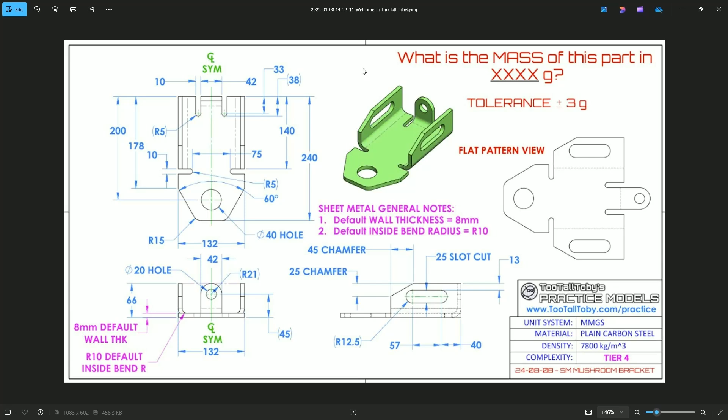And we know some other things: there's a sharp edge here that's at 178. The width is 132, and our bends are set back at 140. And we have this shape here that's got an angle on it at 60 degrees overall. So we'll go ahead and show you how to design this in IronCAD, and we'll use this information here for a lot of this as reference. I'll put it on the other screen, but you can have this if you like by grabbing that practice model.

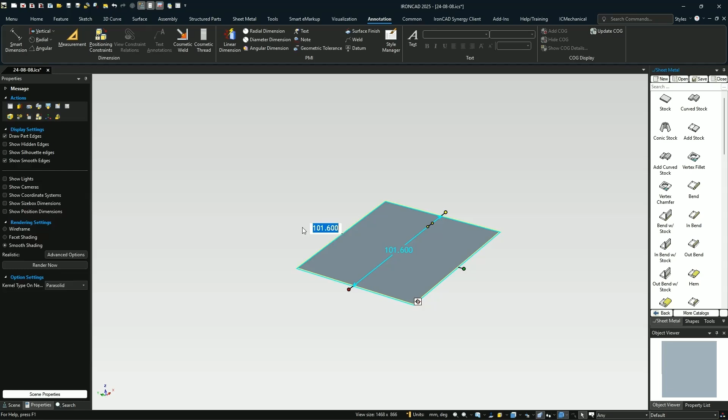So what we're going to start off with is sheet metal, so you can access that in our starters catalog, or you can go into our more catalog and select sheet metal. Either way, you get to the sheet metal components, and we're going to drag and drop that out. I have my system in English, so these are all in English units, so I'm just going to hit OK on that, and then I'll go into our part properties and set the values here. In our case, the thickness was 8 millimeters, and the inside bend radius is 10 millimeters, and we'll select OK to drive that.

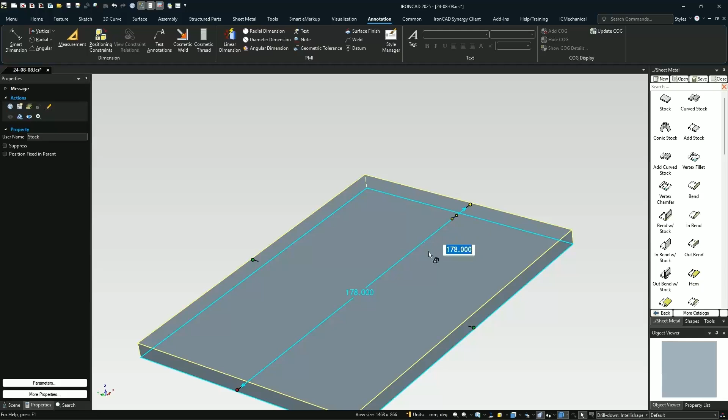Next, we'll go ahead and set the overall size of this. So we know the width was 132, and the starting point that we want to use is actually this sharp corner here before that angle, so that's 178. So that's our starting location. This is kind of our bounding box, if you will. So everything has to fit inside of here from our bend standpoint.

So to do that, we're going to use our out bend. We're going to drag and drop that onto an edge inside of there, and we can pull this up and set the value for this. There's a couple ways to do this. One is just right click on this handle and select edit distance from point, and you can select any reference. In our case, it's the bottom edge here, and it's 66 millimeters from that.

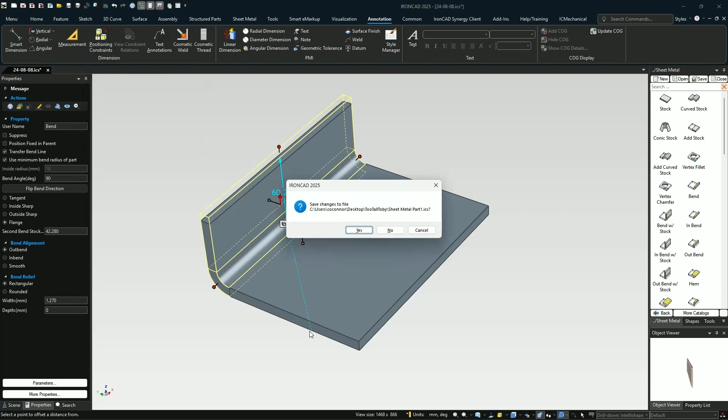Let's see if it changes that. Sorry, I hit the key there on my keyboard. Sorry about that.

So now we've got that set to 66. Next, we want to set the distance of this bend, which is going to be set back. In our case, it's going to be set by double clicking on the handle at 140. Next, we want to do this relief. You can build a cutout and a blend on there, but in our case, we actually have bend reliefs on this thing.

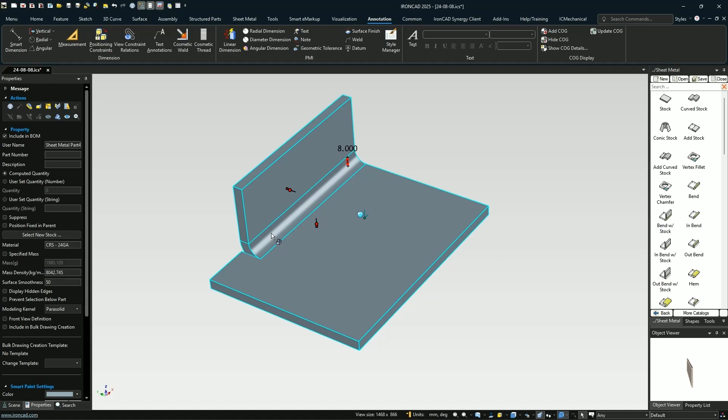So what you can do is hit your tab key while you have a bend selected. It'll switch over to our other handles, which are the bend handles, where you can pull these bend segments in or select these to add a relief. In our case, we're going to right click on that and hit bend properties because we need to set the value for that. In our case, it's 10 millimeters, and we need to calculate this other value, which is actually the 132 minus 75, because they give you a dimension here.

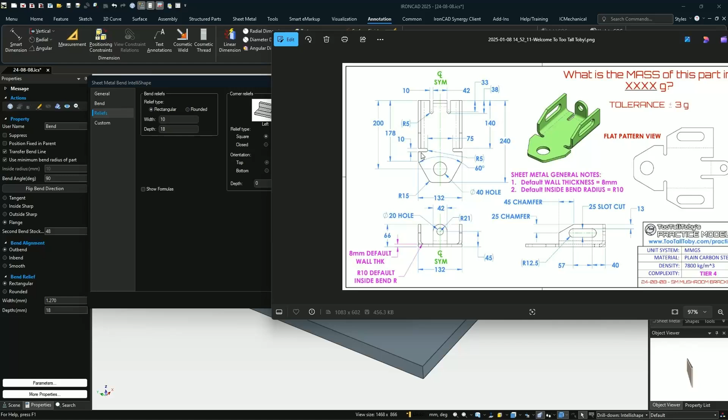I'll show you this. They give you a dimension from inside to inside. So we know this is going to be 5 millimeters here. From this geometry, this cutout here, that's going to add the radius on there, then it's 75. So we'll just subtract those, divide by 2, and subtract the 5, and that basically gives us 23.5 for where this edge is, and then the 5 millimeters will be added for the radius. So we'll go ahead and put that in there as 23.5.

And in our case, don't worry about this. This is if you show formula. There's a formula behind here that's driving this geometry. But in our case, we're going to select rounded and hit OK. So that will build our geometry for us automatically. And now we can continue on our geometry.

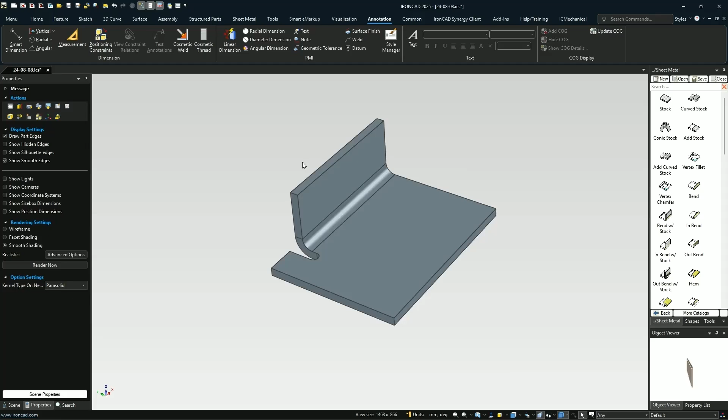The next thing is we want to add a chamfer here. You can use our chamfer tool, or we have a feature called vertex chamfer that you drag and drop on a vertex point, and then you can just use the handles to set the value. In our case, it's got a value of 45 in one direction, and in this opposite direction, this is 45. This one here is going to be 25. So we'll type in 25 for that to build that shape.

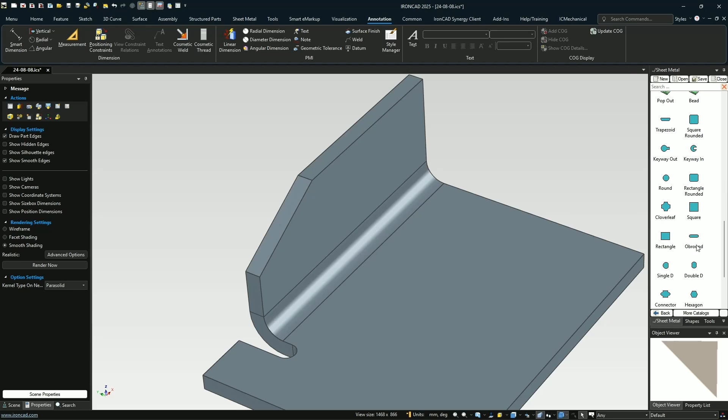Next, we're going to put our slot feature in here. We can drag our standard slot feature out, or you can scroll down. We have some shapes inside that have additional properties. For example, this obround. We'll just drag and drop it out here.

The first thing I'm going to do is rotate this around. So I'm going to lock the tri-ball, grab this axis, and lay it in that direction, so it's going in this direction.

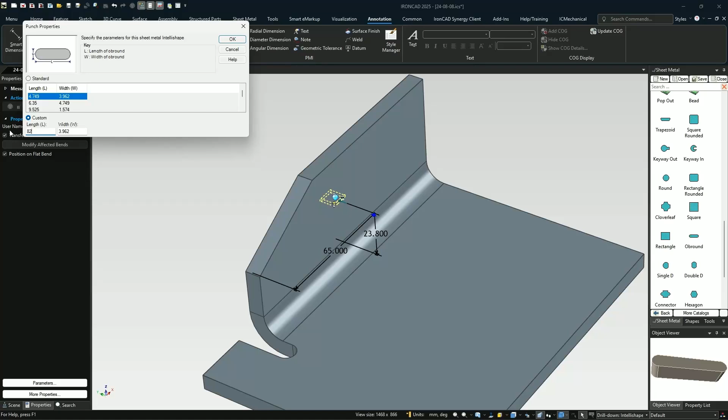Then we can right click and go to tooling properties, and set the overall value for this. In this case, it's going to be 57 plus 25, so 82 for that, and 25 width. We can hit OK.

Next, we need to position this. It's got a reference of 40 millimeters from this edge to the center point, and from this top edge to here is 13 millimeters.

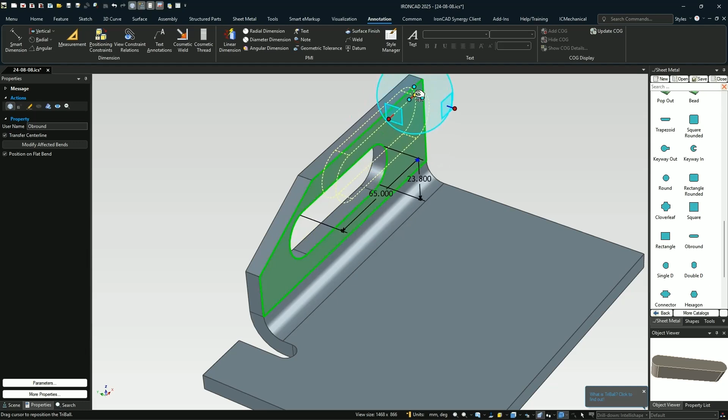So what I'm going to do is turn the tri-ball on, hit the space bar, and move it up to this point here, which gives us the center point and the top edge at the same time. Now I can move this by hitting the space bar again, moving the whole shape up to this top corner point.

Now I can use what we call our plane handle. I'll right click and move this down, and it's going to give us two directions here. If we go ahead and hit move, it's going to give us those values. It's kind of hard to see, but if you zoom in, it'll give you direction 1 and direction 2.

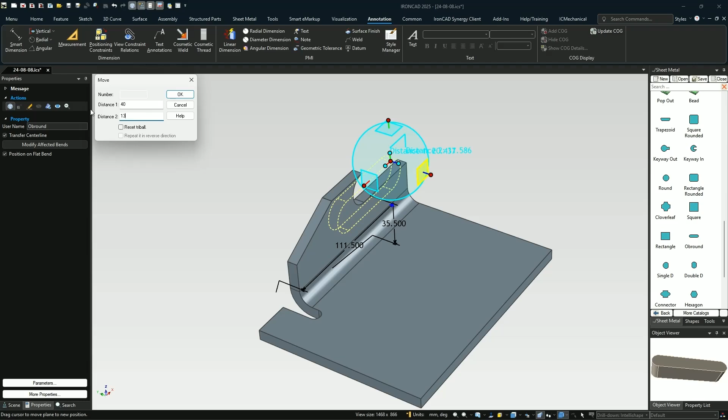Our direction 1 in our case is going to be 40, and our second direction is going to be 13. We'll hit OK, and that should move us to those locations.

Just to confirm, you can select this edge here, select your top edge, and you'll see that distance is 13 millimeters from there to there, so that gives you the value for that.

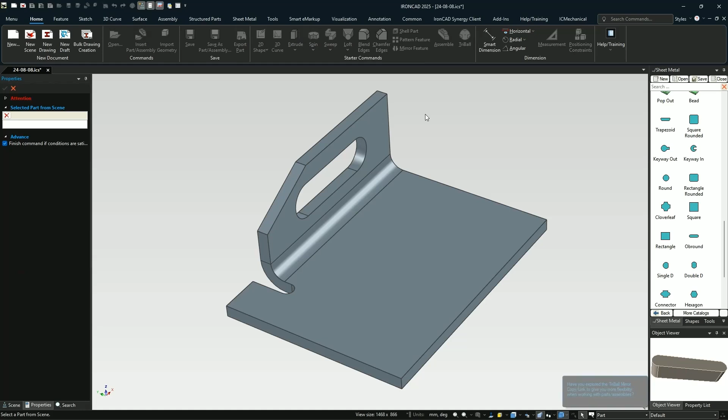Now that we have that shape created, we need to duplicate it onto the other side. So we'll use our mirror feature command. If we go to our home or feature commands, you can select the mirror feature or select our part. What we're going to mirror is this bend.

We're going to select our slot feature and our cut feature here that we want to mirror, and our plane in this case is going to be the center point of this geometry. Hit OK, and now we have that on the other side as well.

Next, we're going to drag another bend out here. Again, it has to be an out bend because it needs to be on this back edge. So we'll scroll back up here, get our out bend, and drag and drop it right on that center point, because it's important to have it there.

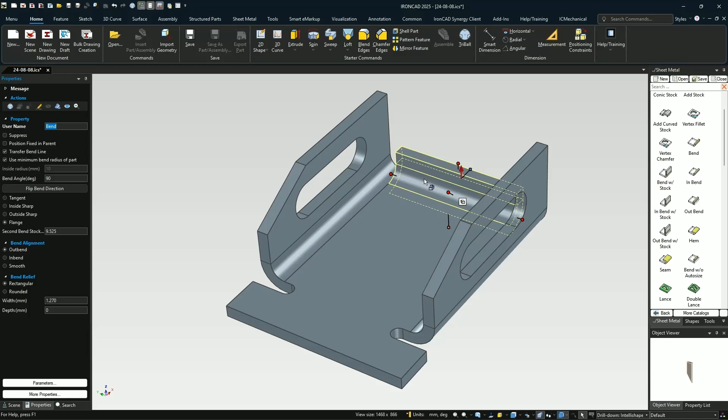What we need to do is set the width of this, and we know the overall width is 42. So you can go into the IntelliShape properties, and there's this above and below, which gives you the total from that center point where you drop, and the distances to the left and the right. In our case, we want those to be 21 and 21, which gives a total of 42 to get that centered.

Now, I mentioned we need to set the height for this before. We right-clicked on this and set it to the bottom edge. To set that, you can also double-click on these, which brings up your stock bend height, and you have various settings in here.

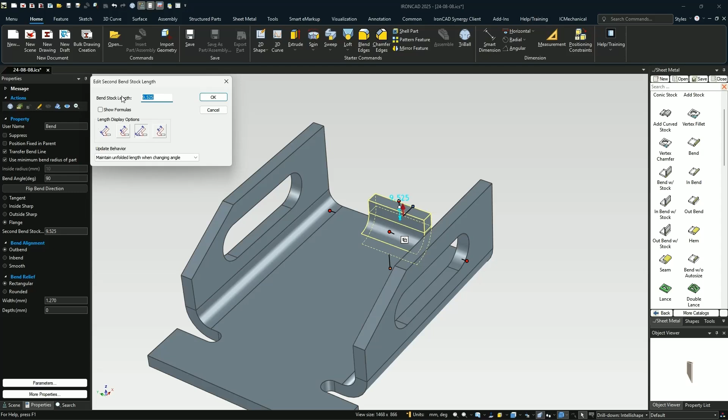So if you want a virtual sharp value inside of there, you can edit that distance. In our case, this needs to be 45 from that virtual sharp, so we'll go ahead and set that.

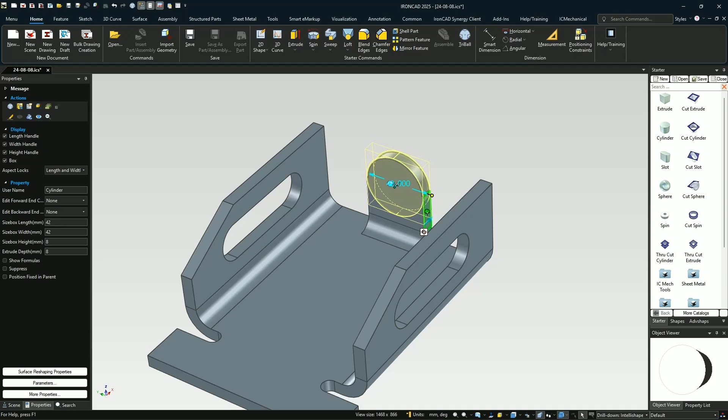We can use other geometry inside here, standard geometry, to add that arc to that. So let's go back to our shapes catalog or starter catalog and drop a cylinder here. We'll flip that the other direction, snap align it there, and grab our outside handles and snap align that too, which gives us our basic shape for that model.

Next, we can go back. We can use our hole feature to do this, or our other feature, either way can work here. So we'll drag and drop a cylinder on this. In this case, it's got a diameter of 20, so we're typing 20 for that model for the hole.

So that gives us our diameter hole. And now we need to add our reliefs to this. Again, in this case, this one actually gives us our information for us.

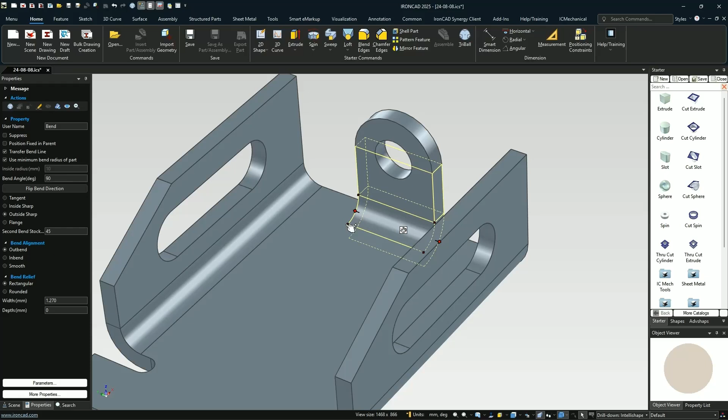So again, hit Tab key, select on your corner relief. You can right click, go to bend properties. In this case, it actually gives the information that we need.

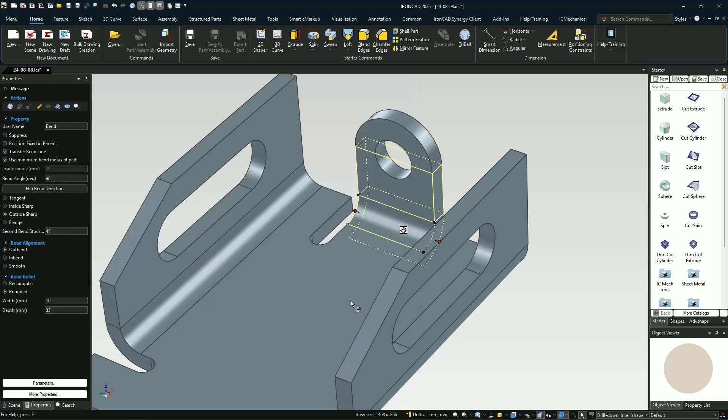So we know this is 10 for that value, and we know the depth in this case is going to be 33 for that model, because it gives you that information inside of there. Again, this is just modifying the formula, and we're going to go ahead and hit rounded for that, hit OK, and we can do the same thing for this side as well.

So it's going to take both of those values and automatically add them. Okay, so now we have that geometry created for us there. The last thing we need to do is add this triangular shape here, and what we can do is go back to our sheet metal catalog, and we're going to add stock from this location.

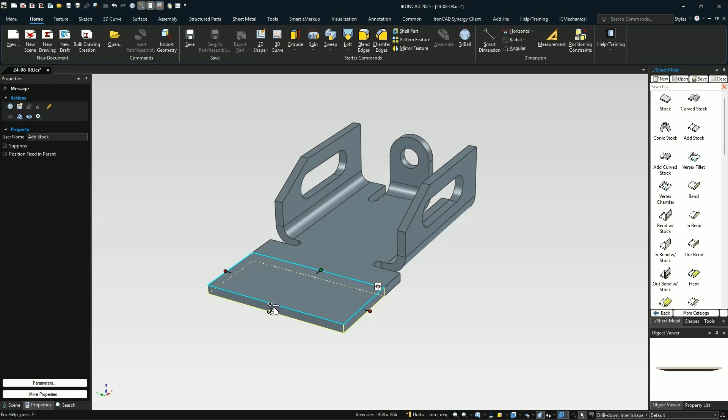And we know the distance, the overall distance from this outside edge. We can right click, edit distance from point, and we know this back point here needs to be 240. So that overall distance is 240 for that geometry, and now we can edit this cross section.

And what we need to do is change these angles on this. So I'm just going to put some dimensions here to make sure that we maintain whatever height this is. And we're just going to leave this as a locked constraint here. And now we can just kind of pull these in.

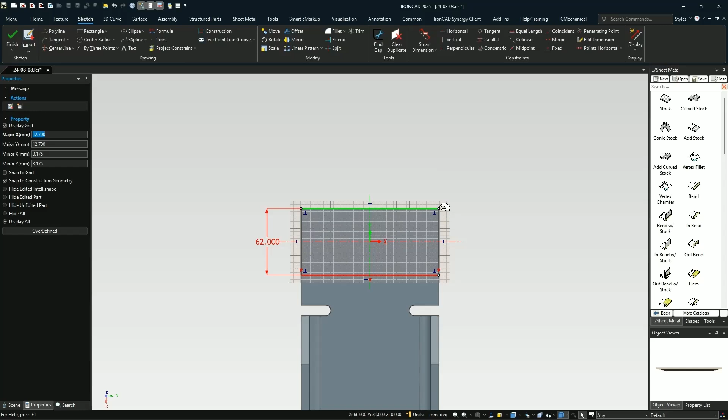Either way, we just pull both of those in, and we can just type in the value. So it's going to be 60 inside of there. So we select on this guy. That's going to be 120 for that one. And we can select this one, and that's just going to be 60 there. So that will give us our dimension, overall dimension.

If you want to see that, you can put a dimension from here to here to see that. It's going to give you the 60 value. I'm just going to leave that off. So now we've got that shape there.

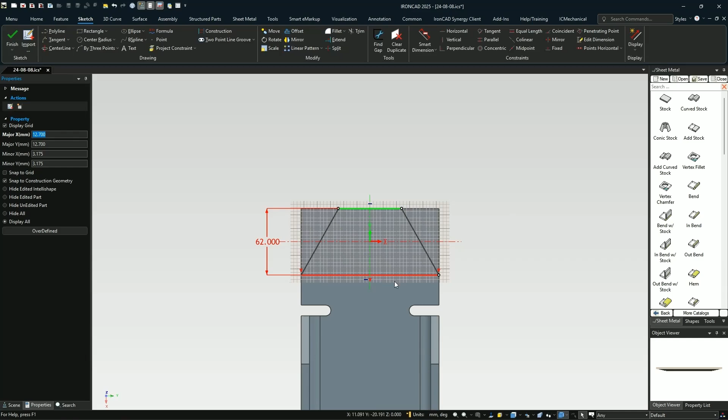We can add the blend. We have a blend that's going to be here. We can add it in here, or we can do it with our blend feature just to show you this. We can select down to these edges here, and we know that it has a blend edge value of 15 millimeters for that. We'll go ahead and select this other one as well. Hit OK, and that will give us our shape.

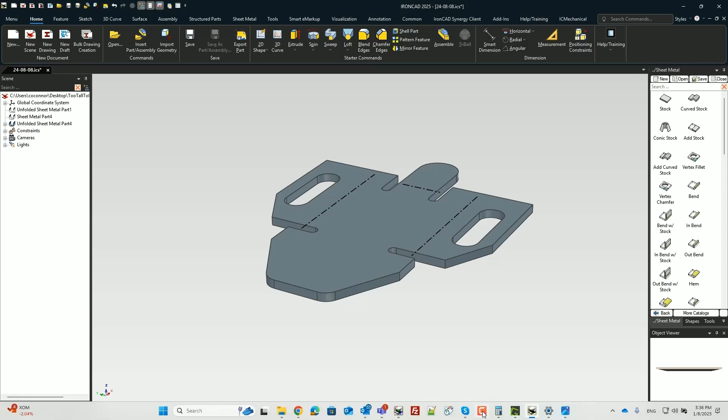So that's our overall geometry for this model, and if you want to unfold that, you can unfold this. You can look at that model if you like, using our look at tool. Select that, there we go. And see that geometry there? That's your model in this case.

And we can go ahead and refold that back up. In this case, the model, we'll go to our properties. We need to set the mass density for this guy at 7800 inside of there, and we'll tab out of that, and that should give us a value, let's make sure that's correct, of... Oh, sorry, that value's not correct because I'm missing one last thing here.

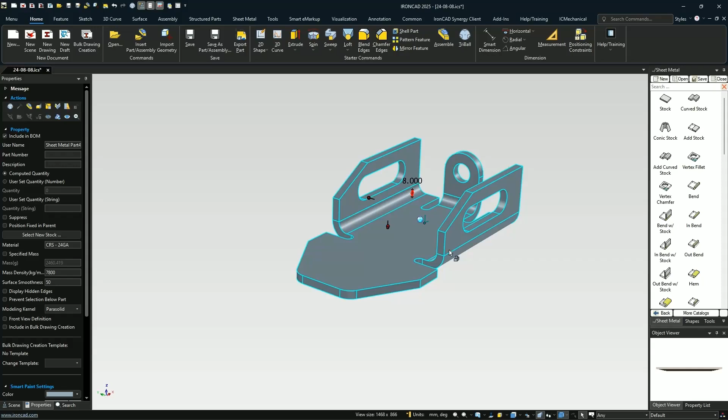So sorry, this is a live video, so let me go ahead and update this. There is a hole here that needs to be added as well. So we'll go ahead and just drag and drop one of our features here, so we can just use custom profiles, another example of tool that we can use.

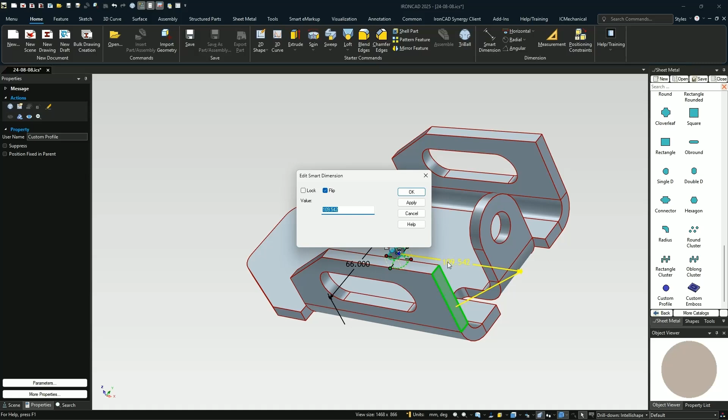The nice thing about the custom profiles is it adds these dimensions for it. So what we can do is just actually say the reference for this is this back edge. It doesn't matter which one. And then we can double click on that, and we know that hole is located at 200 from that back edge. There we go, 200 from that back edge, and it's got a diameter of 40 for that. There we go. So that will set that for us.

Now we will have our exact geometry here when we center this. And now if I look at that, it should be 2382. That is correct. So that's what I was missing on the first one. Hopefully you guys caught that before I did. Anyways, that was the last thing that we needed to add there.

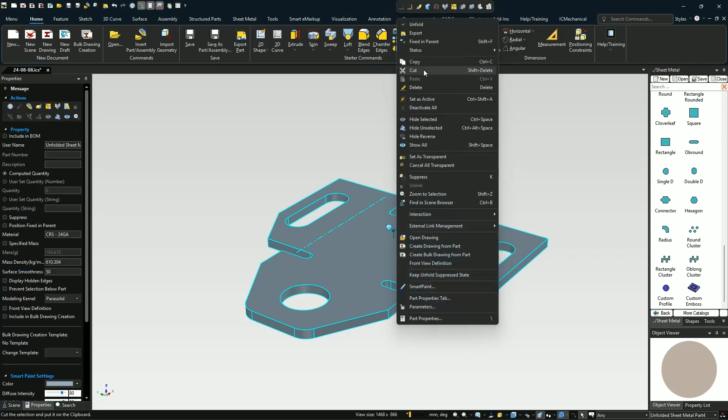If we want again, we can unfold that to get that updated flat pattern as well. But that's our model for the Too Tall Toby example. Hopefully you found this useful on how to use IronCAD sheet metal to use these reliefs on our bends and to use out bends to build this geometry. Thanks for watching.